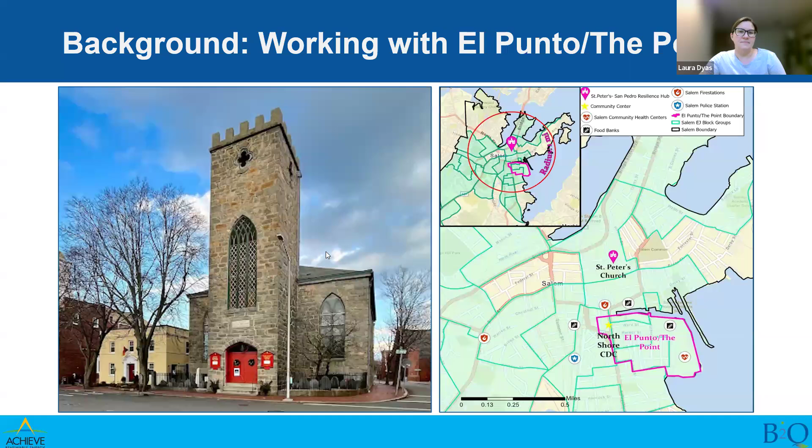And so, as they were looking at their boiler system, it's coming to the end of its useful life and is in heavy need of repairs at all times to keep it going. So the priest at the church started researching the most efficient heating systems he could put in his building. He stumbled across geothermal and realized that not only is a geothermal system extremely efficient, but a network geothermal system is even more efficient.

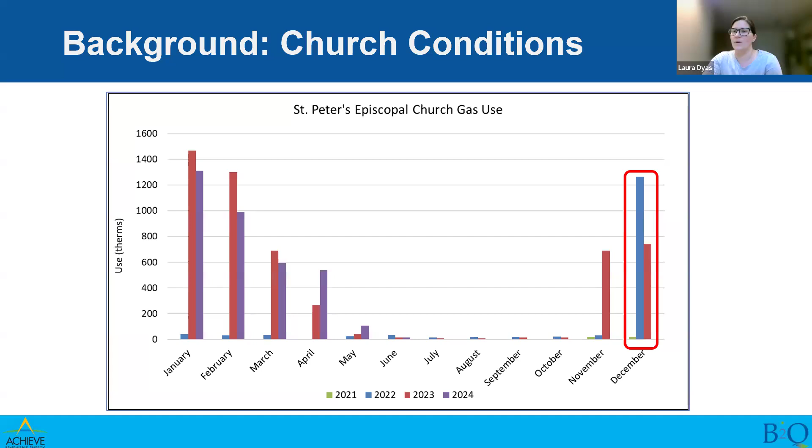We'll get back to our geothermal feasibility in just a minute, but just wanted to say, as I mentioned, at the time they were also doing a microgrid feasibility, so kind of in the same vein, thinking how could they be an asset to the community as well as increasing the efficiency and decarbonizing their building. So one of the things that they studied at the same time was what can we do in terms of a solar system and a battery energy storage system at our church?

The idea being if we could have solar on their roof, we could have solar on other community roofs or neighbors' roofs and create a microgrid in this area. The other benefit of the solar and battery storage system for the church itself, it also creates a resilience hub for the neighborhood. The church has been used in the past when they've needed a space for people to go. We've had some work in the street. The City of Salem has asked the church, can they open their doors and host people while they are displaced from their homes for a few hours.

And the long-term vision is, can they be a resilience hub for extreme weather events, or for other needs in the community, moving forward. So pairing that microgrid, how do we take all of these systems offline and off the grid, combined with the geothermal system, is the long-term vision and something they are continuing to work towards. A lot of background information. Any questions at this point before we move on to the geothermal feasibility study itself?

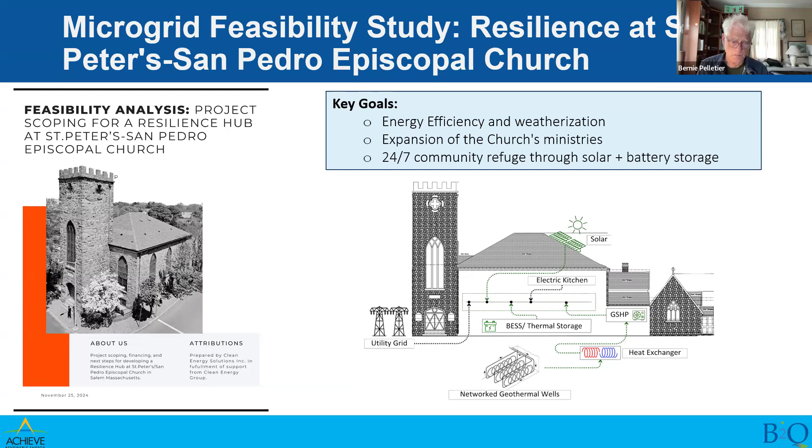Yeah, and absolutely. Potentially, thermal energy storage could be possible with the network system, depending on the arrangements of the geothermal borings and whether they're in one or multiple locations. So it's something that can be considered, but it's not part of the evaluation that we've conducted. Great, thank you. Any other questions? All right. All right, great. I'll continue here for a little while.

Laura and Peter had mentioned the Kickstart Mass program that was funded by the Massachusetts Clean Energy Center, and they had awarded administration of that grant process to HEET, Home Energy Efficiency Team, and they were able to provide grants to 13 communities or groups. And those grants were either $10,000 or $50,000. $10,000 grants were intended to be a preliminary evaluation. The $50,000 grants were intended to be actual feasibility studies.

You can't really do a feasibility study of the level that we have for $50,000. Both B2Q and Achieve donated a fair bit of time to the project because of the good works that St. Peter, San Pedro does, and because we wanted the evaluation to be successful. So there's a pretty wide variance in the level of detail in the different studies that were done, and we're proud of what we put out.

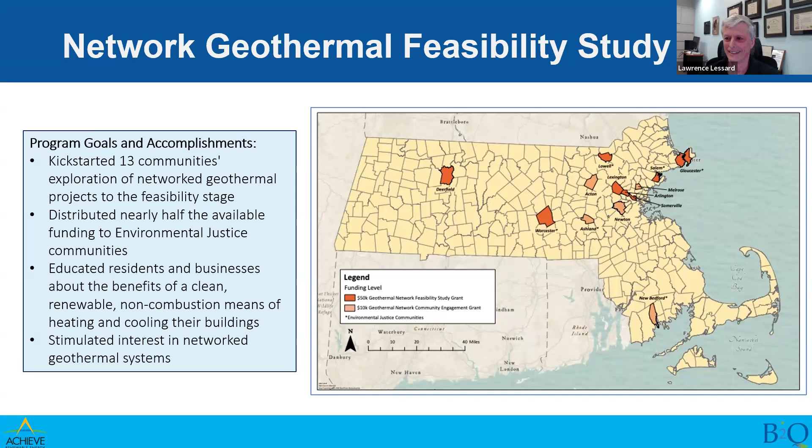Peter's and these surrounding buildings. And there's a good mix of heating and cooling dominated building loads in this area. So Laura's boss, Paul Banks, was out on a site visit with me and just turned to me and said, well, if we can't do a thermal energy network here, you can't do it anywhere. So it turned out to be a pretty strong study area.

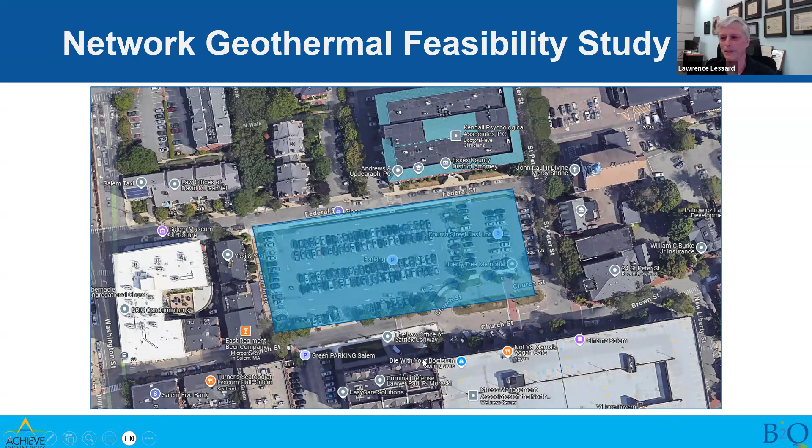However, and we can go to the next slide. Two things happened that made that not the plan that we eventually evaluated. First, with outreach by Reverend Ives and Laura and my company, but really Reverend Ives is a force of nature, so he deserves most of the credit for the outreach. He identified 21 buildings where they were interested in participating, and these included the Peabody Essex Museum, which is a large internationally known museum facility, some tourist sites, residences, the low-income housing facilities, and all of that. Well, these 21 buildings have heating and cooling demands that exceed what we could do in this parking lot.

At the same time, we were speaking with the City of Salem, who has been incredibly supportive of this project. And in fact, over here on the left of the image, we have City of Salem properties. That's City Hall there, and then the bottom left, that's a historic old Salem meeting hall, originally their seat of governance. This area has been developed since about 1630. But in talking to Salem, they expected to develop the parking lot. So they had not specific but general development plans. So it wasn't going to be feasible for us to install a ground heat exchanger there.

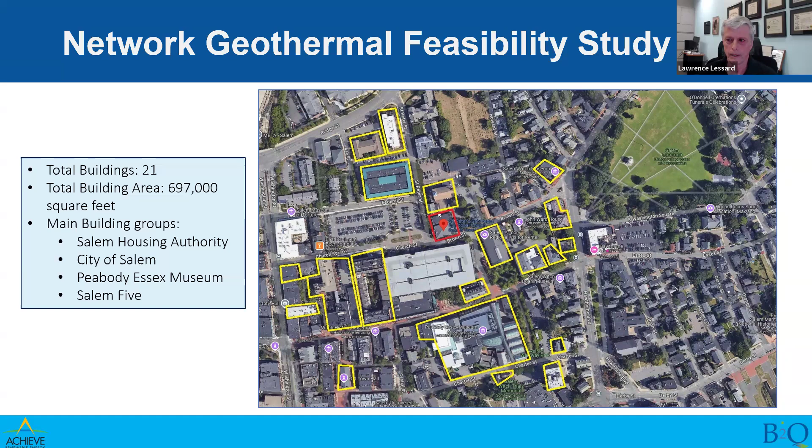Now, in studying the ground heat exchanger, we had an advantage that we already knew the nature of the rock, its formation, thermal conductivity, and diffusivity, and baseline temperatures. We knew that because my company has done formation thermal conductivity studies in the area, and because the city had a test boring and an FTC test at the old town hall, or the old town meeting house.

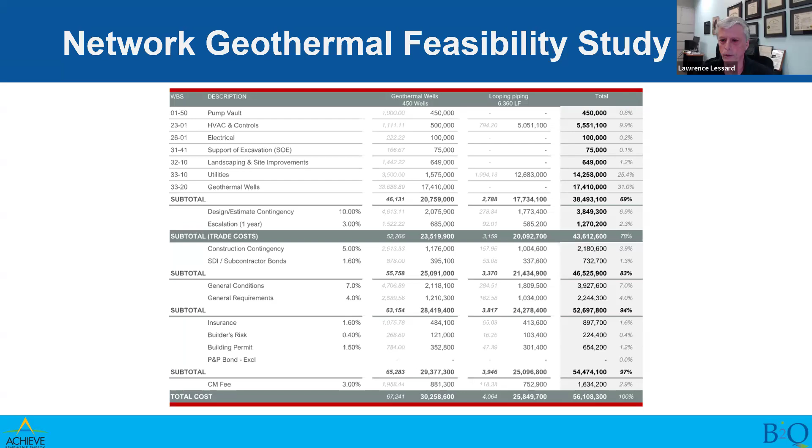Now, hearkening back to Laura's introduction, this assumes that we're only going to be able to work certain times of the year, then things have to be put back together for the tourist season and various other Salem specific requirements. And if someone were to look at this project without those optics, they could conclude that it could be done for less. But in Salem, this was our best estimate at the time. Now we think it probably is biased high a little bit, which is better than biasing low at this stage. But that installation was on the order of $55 million.

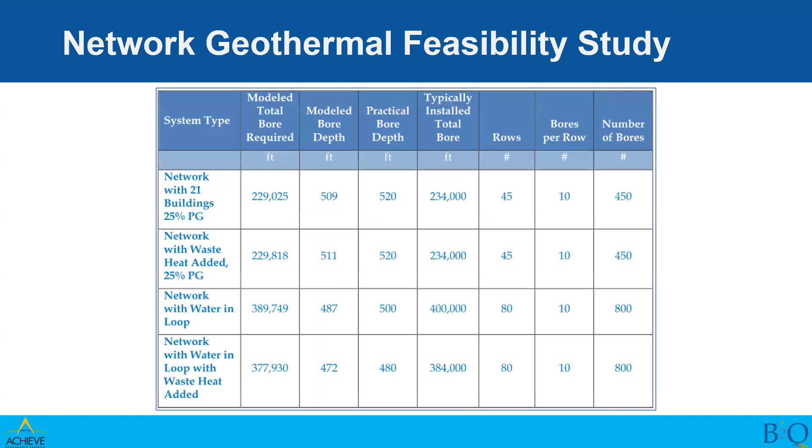Thank you. That's very useful. Yep. And I have one question. I noticed in one of the slides a few slides ago, I saw the figure 85 degrees as maximum temperature. Is that what the temperature of the water coming out of the system into the buildings would be, or was it what you were projecting for internal distribution of water?

That's probably what it was. That's a design parameter used in the software. When we're designing the ground heat exchanger, we give the software bounds that it has to work within. So in this case, we said don't let the antifreeze temperature get below 35 degrees in the winter, and in the cooling season, don't let it rise above 85. So it's a theoretical maximum under peak load conditions that the temperature could get to.

If we made that 90 degrees instead of 85, it would have reduced the amount of drilling, but there's an efficiency cost for that. So it's a first pass at what the entering water temperatures would be designed to be in worst case. Great, thanks.

Yep. And that was something that Larry and I had discussions about too. We were using some example equipment that Larry uses commonly in his projects, and then looking at heat pumps that we use in our projects, and, to Larry's point, where is that threshold of the decrease in efficiency, where do we want to cap that off at?

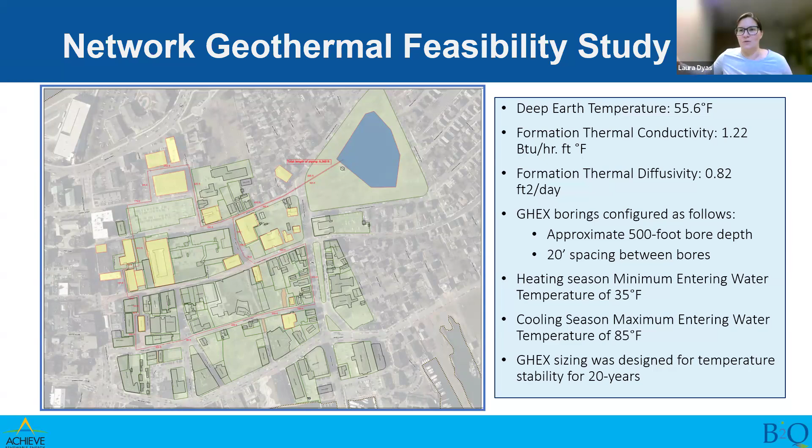All right, so a couple more slides with me regarding ongoing efforts. So you remember that St. Peter, San Pedro is now paying 10 times what they used to for heating. And they have looked at a variety of options that might help reduce that cost pending the installation of the network geothermal system. That includes an on-site standalone geothermal system that's configured so it could connect to the network, or non-geothermal options such as air source or hydronic boiler upgrades. Next slide.

And the HEET team has developed a series of committees to evaluate decision-making, funding, technical expertise, and continuing community engagement. Next. So there is ongoing community engagement with individual meetings and engagement with universities. Massachusetts Institute of Technology is involved. Salem State University, which is quite obviously located in Salem, has contributed. And those efforts are really focused on understanding community priorities and any challenges that are perceived.